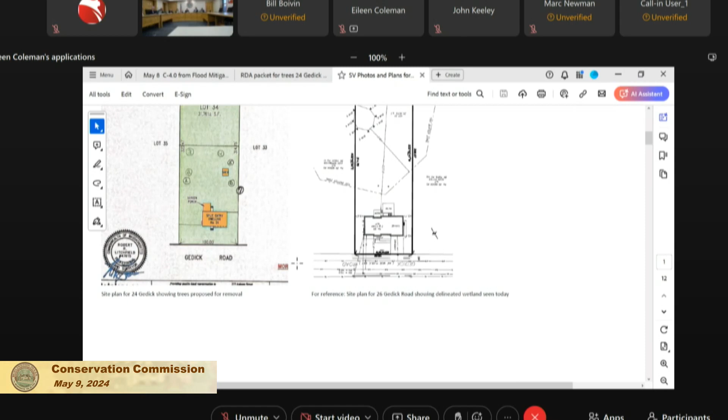Okay, and Bill? I think that the applicant has done an excellent job getting information, and he talked to multiple tree companies. They got clear evidence that these things are damaged by insects, and they've already damaged his fence and his shed. So I think it's quite clear that it is appropriate to take those trees down. All right, thank you, Bill. I have nothing further to add.

Everything's been said. So we have a draft decision, which essentially, if it's approved, will approve the tree cutting with a few standard conditions just for protection of any area in back. So first we'll review it, then we'll vote it, and then we'll have you well on your way. Okay. Sorry, I went back too far. Okay, we'll try that again.

Okay, so, as described, applicant proposed to cut 7 trees within the 100-foot buffer zone to bordering vegetated wetland. As described here, we know there's wetlands at the rear, across the entire width, closest at the rear left corner, and the commission is not making any finding as to the exact boundaries of the wetland resources. The closest trees were approximately 20 feet from the wetland. The application included an evaluation of the trees from a certified arborist.

So this will be a decision only for work as described this evening and no other work. Applicant may proceed with 7 tree removals. Removal of any other trees will require additional approval from the commission or administrator and may require a further assessment by a certified arborist. For tree removals that are not feasible to do by hand, machinery such as bucket truck or crane should be located in the driveway or existing lawn areas, so just not too far back. I had initially suggested 5 trees in this decision, which we can talk about the numbers. Alex was hoping it would be more like 3.

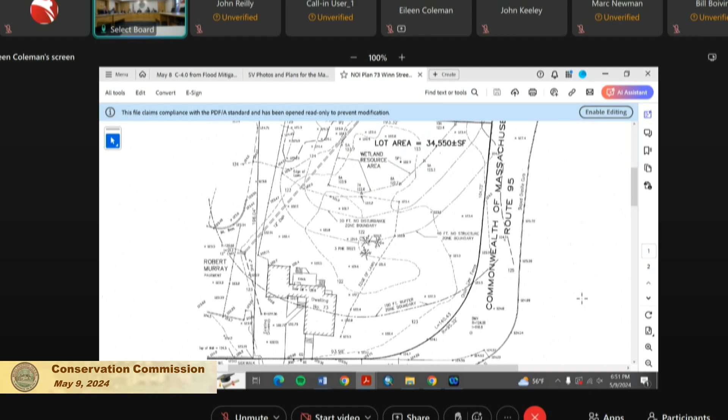As you can see, the 100-foot line is the furthest one out, and it goes through the existing house complex, family room, garage, deck, and driveway. And that's why we're here tonight, because we propose to work in that buffer zone and remove that house.

Coming up to page 2, you can see our proposed construction, showing the resource area, the 30-foot and 40-foot buffer zones, and the 100-foot buffer zone. We propose to remove the existing dwelling, garage, family room deck complex, and driveway, along with the paving that goes out to the paper street in the rear, Winfield Avenue. We'll replace that with a freestanding dwelling in the front of the property, approximately 30 feet back from the street line, and bring a driveway in where the existing curb cut is, on the left-hand side, which would service the existing dwelling and also go around the rear of the house to a proposed garage, freestanding on the right-hand side.

All of those structures are outside of the 30 and 40-foot buffers. They are obviously inside the 100-foot, which is why we're here. From the standpoint of grading, we plan to remove everything, but the grading will be pretty similar to what's there now, just reshaped to accept the new structures. We proposed 2 stormwater management areas, one in the front and one in the rear of the house.

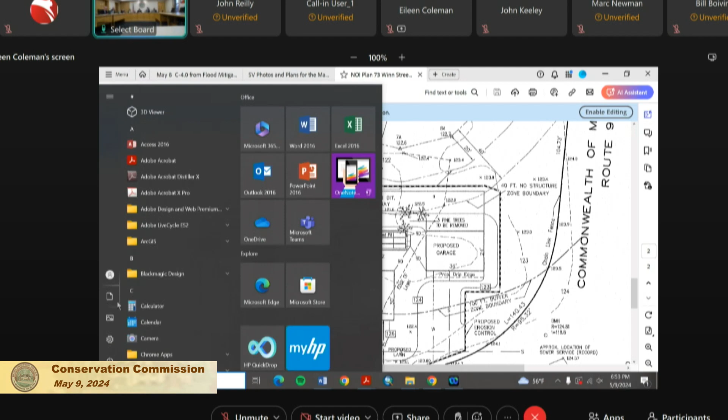All right, good. Thank you for that summary. Thank you. Sure. All right, so John or Eileen, do you have some comments on this one? I do have some comments.

First, I want to ask Mr. Mello for a clarification. Did you say the pavement is being removed at the rear of the lot that goes back to Winfield Avenue? That's correct. Because that's not shown in the plan, and there's no erosion controls. So all the way up to the top of the plan where Winfield Avenue is, that pavement is being removed?

That's correct, and that's something we've talked about that isn't shown on the plans with erosion control on it. If the commission sees fit to allow that to come out where it is back there, we would put erosion controls and amend that plan. That would allow us to eliminate the access—I call it access because the abutters use it, but it is paved out to Winfield through there—and our project has no need for that, so we'd like to eliminate that paving.

That was not anticipated initially, but Mr. Casciola and I have talked about it. We think that would be a benefit to the resource area itself. Yeah, no, I agree.

So first I'll talk about the resource area. The wetland flags seemed fine. It's a fairly dry wetland on the edge where the flags are, and then it gets wetter and wetter as you go towards the rear of the lot.

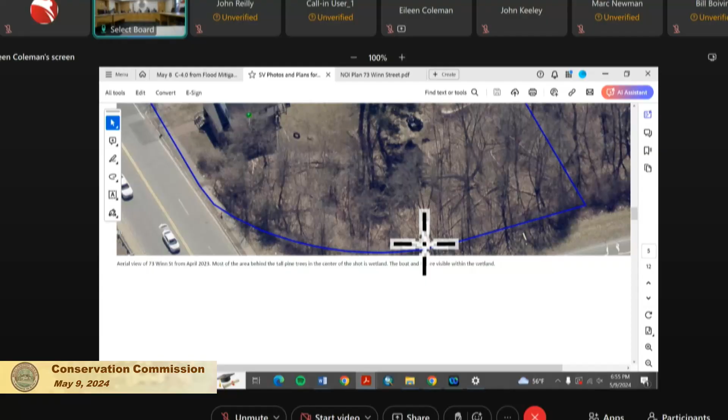There is a drain pipe that goes through there. We did find that there was a structure about halfway back on the lot where the rim or lid of the structure was off of it, and that needs to be addressed. There's a photo of it—it looks like a dangerous situation for kids or whoever. What is it, exactly? I'm not sure if it was an old catch basin or a manhole.

Mr. Keeley, if I may, through the chair—we found that structure shown there; it shows up on my plan right next to, I believe, flag 4A. We do show that on the plan, and we believe that it is the terminus, or the beginning if you will, of the pipe that comes out of the wetland, feeds through the property, into a catch basin on Mr. Murray's property adjacent.

At one time, I think there was a catch basin that was probably a reasonably good structure and has fallen into disrepair. It's off our property, in the Paper Street, Winfield Ave. But we're not adverse to addressing it.

This catch basin here where the cursor is? No, that's one end of it. If you go diagonally up, about 4, right there. Flag 4A is right where this conglomeration of block and pipe is. You mean this pipe here, sticking out? Yeah, the middle, I believe. Oh no, we'll get to the pipe in a minute. But I believe that pipe sticking out may come from this structure. I couldn't ascertain that, it's a little blocked.

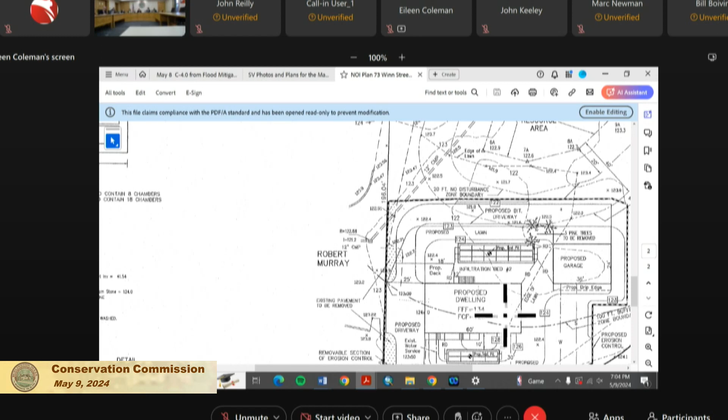Bill? No, that's not what I'm talking about. I'm talking about right above the words existing driveway, there's a catch basin. Oh, I'm sorry. That's a small area drain, and that's going to be eliminated. It'll be eliminated, it does not show up in the proposed conditions, it's no longer necessary. My apologies, I misunderstood the question.

No problem. Say Bill, I think I cut John off, so I'd like to go back. Oh okay, sorry, did I? All set, oh I wasn't done with all my comments. I got done with the comments about the basin for that. Yeah, I wanted to go back to your comments so we could go through everything before we started commenting too much more. So if you hold off just a minute Bill, we'll go back to you.

Yes, definitely, we'll be back to Johnny. We're out of time, you know, we don't want to cut him off on his last couple. Do you want the rest of my comments about the project overall?

Yes. Okay, so in addition to the structure we're talking about in the wetlands, there's a number of other foreign objects in the wetlands. There's a trailer, there's a boat, there's a lot of trash and debris that needs to be cleaned up. So I think you're going to have to authorize some equipment in the wetlands to clean up the basin thing and also some of the other stuff.

It actually looks like maybe former residents used it as a dump or something. There's a lot of old glass and cans and stuff like that back there that need to be cleaned up. Clean it up. Yeah, we got it.

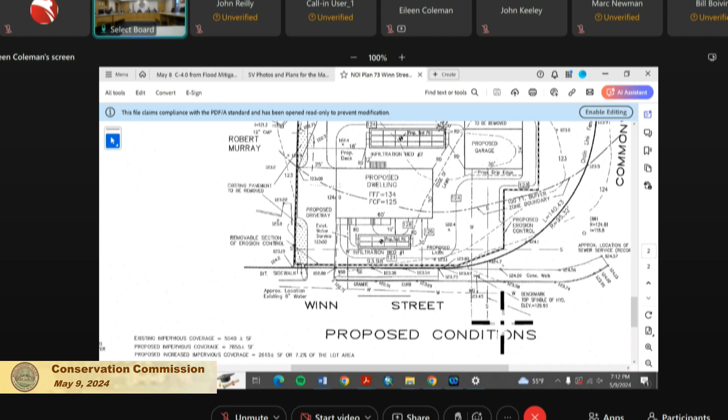Okay, does anything need to be done, John, in this regard? So we just need a new table of the proposed impervious versus the existing. Okay. And if I'm going to do that, I'd also like to alter the limit of work and the erosion control. Yeah. And we'd be happy to do that subsequent to any action the board may take. Okay, I'm done. All right, you are done. Okay.

Sarah? Just 2 comments. I'm just struggling to understand why the driveway does the thing that John pointed out, why it goes all the way around. It seems to me if you change the aspect ratio of the house, maybe to be portrait instead of landscape, there would be room for the 2 side by side. Wouldn't that be a better use of land? That's one comment.

Second is there was a structure in the backyard that I could not identify. It looked like a concrete donut with some sort of a hole under it. I wondered if it was a well. It's not mentioned anywhere on the existing plan. I'm kind of thinking it's a fire pit. I thought initially it was something too, and my guys poked around and put a stick down and couldn't find the bottom.

Yeah. We've asked. It doesn't seem to be connected to anything. It's certainly not anything to do with sanitary. That's key. Well, it might have been at one time, but we don't have a lot of good historical records. So we know that we have sewer, and I know what you're talking about, and I don't know either. So what do you want to call it, a concrete donut? Concrete donut. Yeah, I like fire pit. All right. Oh, that thing. Okay, Rob?

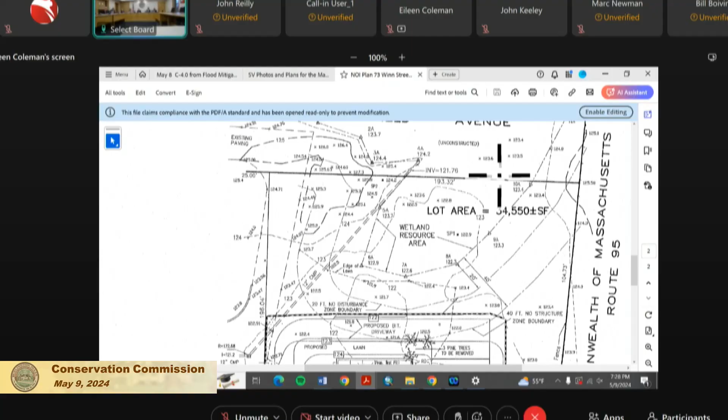And the water out there now is at 123.5. It's meant to maintain it, not drain it. I was just concerned that the rim might be 121, and that would clearly do a serious drain. That's the invert of the pipe. Okay, thank you. Is there anyone else that has a comment?

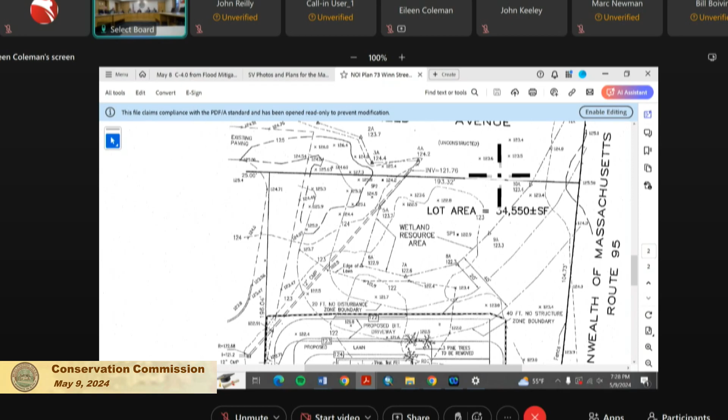I have one more question. A lot of the front of the wetland, where the line was done, has a lot of invasive knotweed. So I'm asking the staff, do we want to ask for some effort at removal, or it's not easy to do either? No, and it's not limited to just their property either. It's on the Commonwealth property, it's on the Paper Street property. So it's pervasive. It would probably just come back if you removed it on this parcel. Okay, just thought I'd ask.

Larry, can I ask a question, please? Sure. I'm wondering, that big driveway going back around to the garage, is there a possibility that could be something like grasscrete or a ribbon driveway, just to reduce the amount of impervious? Allow me a moment. You want to take the paving out of there? We've had our moment. We've just negotiated. You can take 2 moments. Well, we'll take the solid bituminous paving out and we'll put crushed stone.

Okay, gravel driveway, that sounds good. Okay. Okay, so let's go over a couple of things. It sounds like we need a revised narrative, and we need a few changes to the plan to indicate everything that we've talked about.

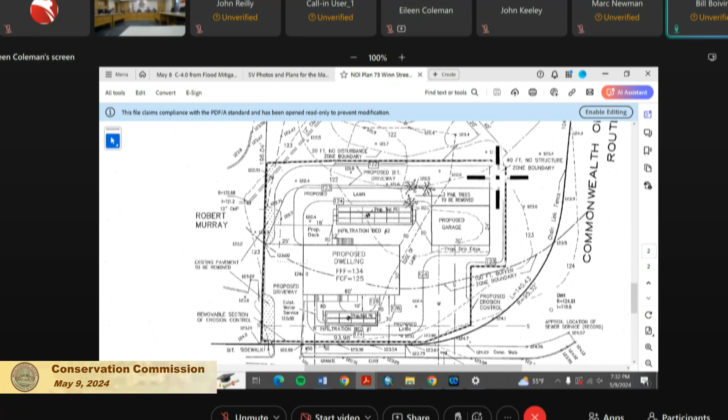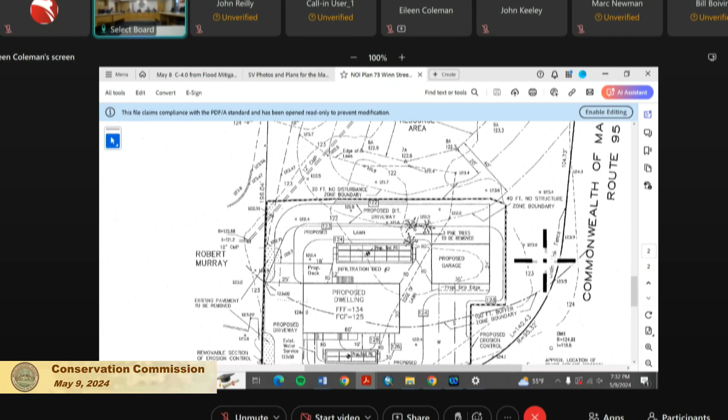So I think we have a good summary. I got one more thing, Larry. Yes. This is Bill. I think there should be, in the finished product, some kind of demarcation at the 20-foot no disturb fence, to prevent mowing and intrusion. All right, we certainly can put that in the order.

Okay, anything else? Well, they're conferring again. Did you folks have another moment? No, we've had plenty of moments, thank you.

Just more of a question of where we go from here. Do you want us to revisit at a future meeting, come back to see the commission, as opposed to issuing an order and incorporating? Well, are you asking whether we will close at the next meeting? I don't think we have a draft here. I'm just aligning my calendar. Let me ask, do you see any reason why we can't close at the next meeting? If they provide everything that we talked about this evening, then I think that would probably be okay.

Okay, and we have to get it in by a certain number of days ahead of time? Forthwith. If you give me a date. You mean for the next meeting? No, to resubmit. Oh, well, ASAP, a few days before. Okay, so next week. When's the next meeting? May 23rd. Can you get it in a week? It's an eternity. Have it done next week. All right. Okay.

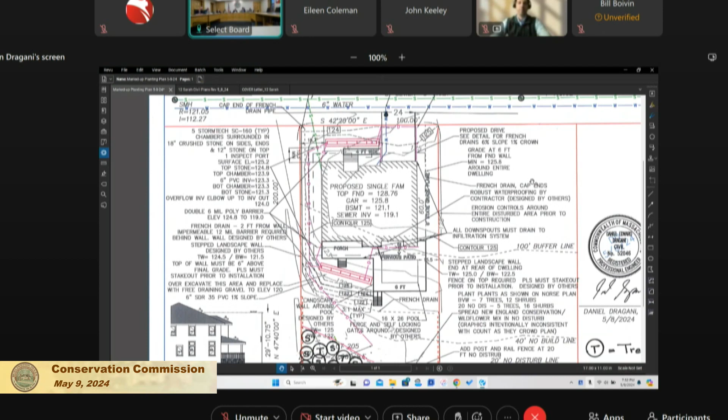Okay. The overflow outlet from the infiltration system had originally gone down parallel to the property line. So it was discussed at the last meeting to shift that towards the middle of the property, towards the wetland, again just to try and reduce any water or possible impact to the neighbors. So we have provided that revision as well. So the overflow pipe, that's the pipe that's going to the middle of your yard now? Yes. Okay. All right. A post and rail fence has been added along the 20-foot no disturb zone.

Plantings. We are proposing to restore the BVW. Trees are proposed 20 feet on center, shrubs 10 feet on center. So in the BVW, we're proposing 7 trees, 12 shrubs, and a wetland seed mix. Mr. Chairman, I called a number of nurseries trying to get a black willow. No black willows. I actually thought that would be the case. Unfortunately. But I did make the attempt to try and get the native black willow. I don't know why they don't carry them, but they don't. Got it. I understand.

Buffer zone plantings. So we're proposing to restore the 20-foot buffer, 20-foot no disturb. We're proposing 5 trees, 16 shrubs, as well as a conservation wildflower mix in this area. As part of this proposal, I'd like to extend the erosion controls around the back of the property, down the rear property line, because in the BVW there was some stockpile of wood and branches and that type of material. I'd like that material to be removed, trucked off-site, stake the wetland flags, plant, apply the wetland seed mix. The temporary wetland disturbance is 1933 square feet. Again, that will be temporary to remove the material, plant, and essentially let it come back.

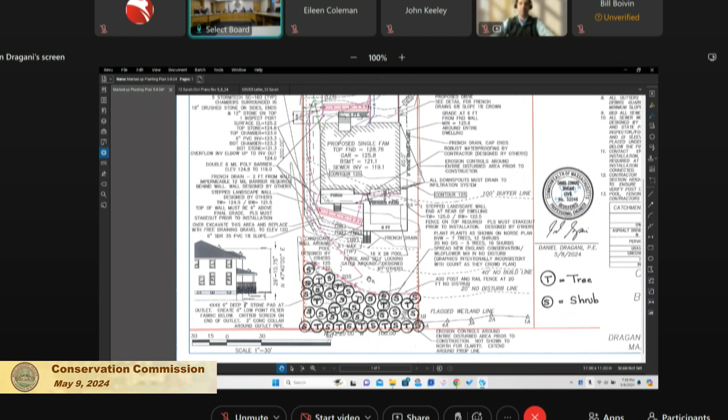I addressed the DEP comments. DEP had comments regarding reviewing aerial photographs and seeing several structures in the rear yard. That obviously was removed prior to the NOI filing. I did not remove those. Those structures were removed by the previous owner. Okay, I stand. What was this? They had a few sheds in the back. Right, okay, yeah. Okay. The NOI form has been updated to include the proposed temporary BVW alteration to remove that material from the BVW, the wood and the debris, and to do the plantings as well.

I know drainage was a concern, and I'm going to hand it over to Dan, who can talk about the additional work he's done regarding infiltration and drainage. Thank you, Maureen. So just briefly, previously we met the standards of installing a drainage system in the front of the property. At the last hearing, the commission requested that we expand that system within the front of the property. In looking at the standards, we become too close to the property line there. So it is my professional recommendation for the additional drainage facilities to be proposed in the rear of the property. We are proposing to double the size of the stormwater system based on what we originally proposed. And that's also in addition to some additional chambers we had added based on comments from the Town Conservation Department. So what we show here today is a very robust design, and I'm certainly pleased to show it.

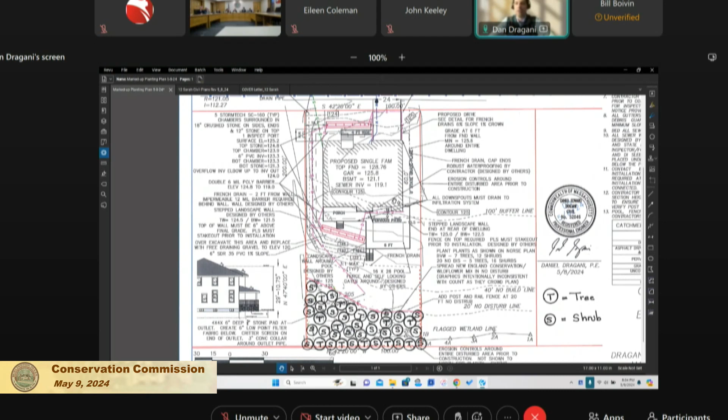So if there was a very heavy rainstorm, is there a possibility of water flowing over the wall? Currently we have the wall protruding an additional 6 inches in case of surface runoff, which will run into the drainage systems. We also have a backup French drain before it gets to the wall. But if it gets past those two systems, it would be met with a 6-inch height it would have to rise over to come over the top of the wall, essentially bringing that water to the rear of the property, if that helps answer your question.

I was also wondering about water and snow — if it's stepped, what's the width of it, and does it create an impervious flow versus just trying to retain all the water within the applicant's property?

That wall essentially is just retaining the land to provide us a higher elevation, and we're going to extend the top of that wall higher so that any surface runoff wanting to flow in that direction won't be able to freely flow that way.

Is there anything — I know it says the wall will be designed by others — but do you know if it's timbers or stone? I could certainly double check with the applicant. My guess would be this would be essentially a stacked retaining wall, those blocks you commonly see that are about 8 to 12 inches long, stacked.

Go ahead, Rakesh. Sorry, that is with the blocks. Okay.

Okay, Sarah? My understanding was the reason there was originally not a catchment basin infiltration chamber in the back of the house was that the water table was too high back there. Could you explain why that's not a problem anymore?

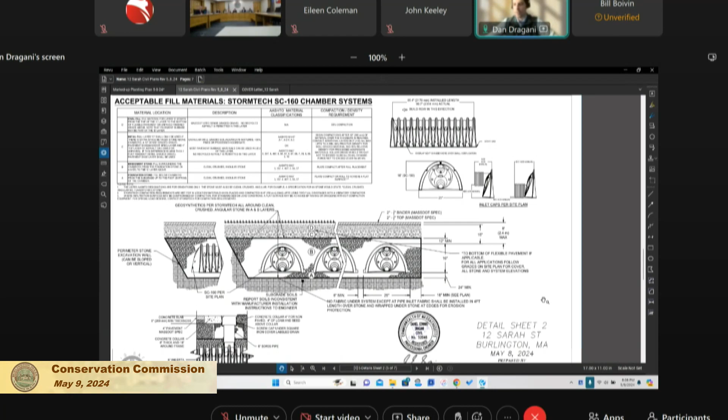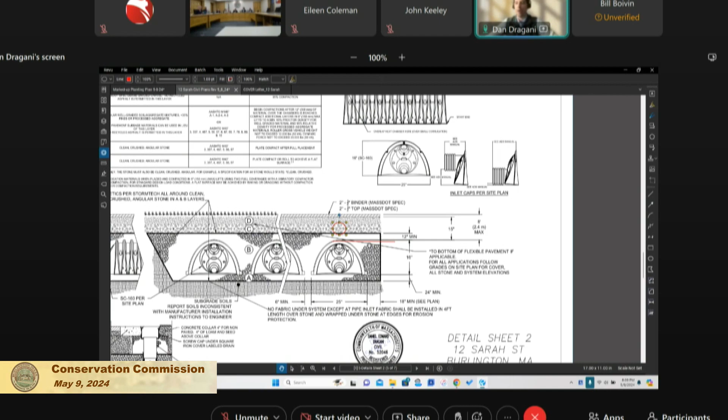Sure, of course. So I can go to the technical details here and try to draw the overflow pipe. The top of the system is located here, and the invert elevation for that overflow pipe will be something like this. Essentially those drainage facilities need to completely fill up, including the two feet of crushed stone on the bottom of the system, 16 inches of chambers, and also stone cover on top. Those all act as volume that those systems capture. So for water to come out that outlet pipe, it has to fully fill the drainage facilities in order to do so.

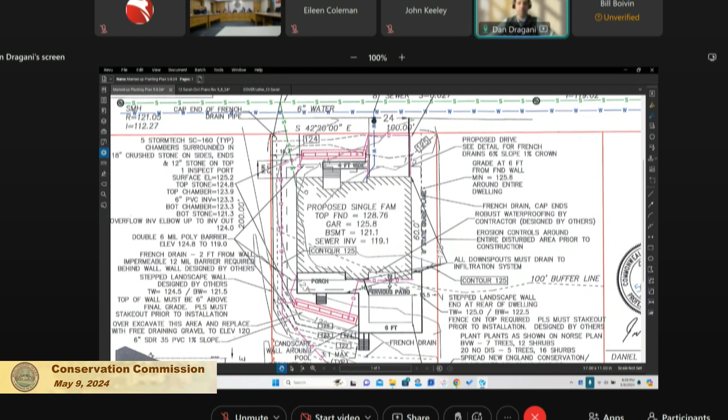That front of the property, I can flip back to the other plan. Essentially we're picking up the runoff from the driveway via French drains that flows into the drainage system. It also picks up the roof leaders from the front, and those all flow into the system. It will then have that overflow pipe at a higher elevation than the system elevation, and that also goes for the system in the rear. We've proposed those elevations for the overflow to be higher than the existing or proposed drainage facilities shown on the plan.

So in larger storms, you may see water coming out of that outlet pipe. We have proposed a stone pad there to limit any erosion or concerns, and also a concrete collar around that pipe just to retain it in its current location. The intent is for this to be a bit of a depressed location, so that pipe isn't essentially just right there on grade, if that helps to answer your question.

Is that really going to help where all of this ends up, on the lower end of the property? That's where all this drainage is going from a number of homes, including, what we've learned, the homes behind these on another street. Is this going to add to that because it's all going to one location?

Sure, of course, that's a good question. So running the HydroCAD analysis, this reduces the volume based on which storm you look at. It reduces the total volume of stormwater by about 15 to 20%, which is definitely significant for this lot. You will still see flow coming out of that outlet pipe during larger storms, but we have reduced the volume of stormwater by 15 to 20% overall.

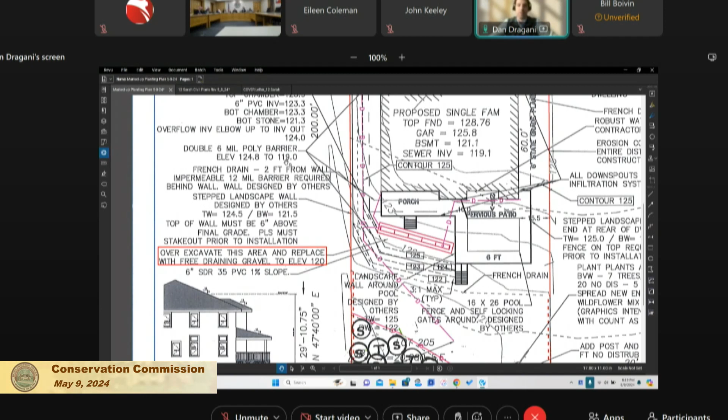Yeah, I am impressed with that design. Thank you, thank you, appreciate that.

Okay, yes John, so one other thing, just a question for the commission. Would you feel comfortable closing this hearing prior to seeing a design of the retaining wall? So the retaining wall isn't being designed by the project engineer, somebody else is designing it. Given its location, I would suggest you want to see a detail of the wall.

Unless you can - when you build a wall, Indra, this is your area - can you put up a performance spec on the wall that would essentially guarantee you're going to get what should be done? Or do you need to see the actual design? Actually, the retaining wall is to retain the earth. So that's what we see - what material, how deep it is, how high the wall is. This is 3 feet high.

So you would say it's better to see the design, or can you do it on a performance basis? It can be - I don't think we need to see the design. It's 3 feet high, right? Am I correct? I'm not sure. Correct, yeah, it is 3 feet high. Yeah, so I'm not too concerned.

Because a lot of times they do a performance spec and say it must be X, Y, and Z. In the spec it would be the material, what material it is. Oh I see, no, nothing - and I'm not concerned about it. So for instance, for a 3-foot wall, would it require weep holes? I don't think so, no. No, it's unlikely, right? It's too small, 3 feet is really small.

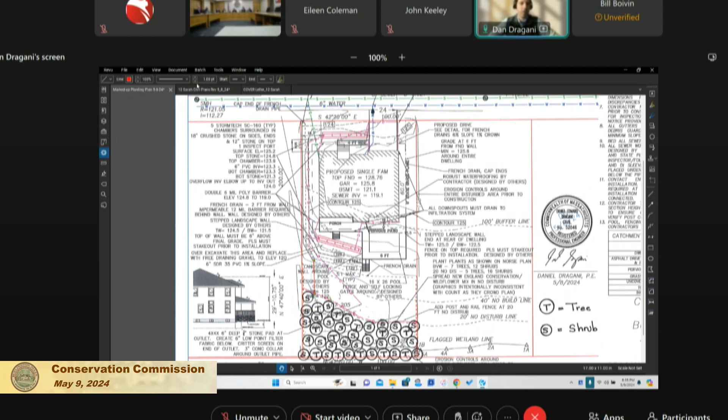And looking at the plans here, it looks like it goes just along the porch. It doesn't really go beyond my backyard where the grass area is. It's still within that area, and I didn't know if it could go further out, but now it looks like the wetland mark has been moved closer, so it doesn't seem like it can go any further. Yeah, I think we'd be open to that, though. If you'd like an extension here, I would be open to that if that's something that concerns you.

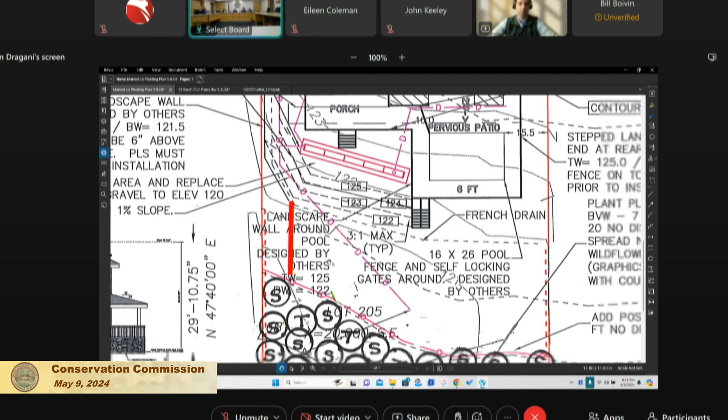Could you blow it up and show us where, because it's very hard to see here, it's so small. Sure, of course. If you'd like to see an extension in this location, I'd be happy to do so. I certainly work for the developer here. I just want to put it on record. I don't make up numbers or do anything different based on who my client is. I try to design these systems and properties as if I live next door. So I just want to express that.

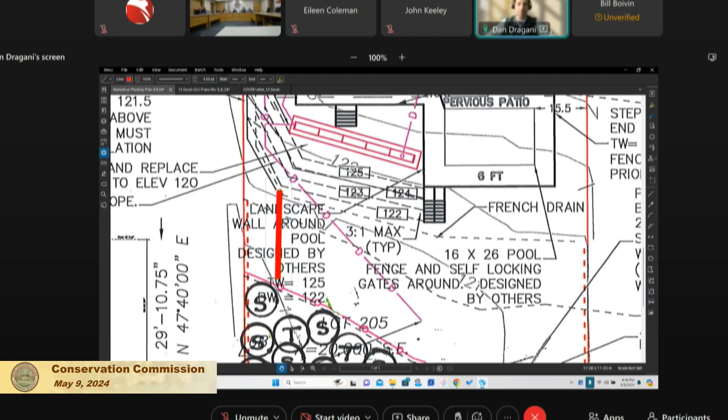I have a question regarding the French drain. This is Sarah. Is the purpose of a French drain to take up surface water that percolates down into the French drain, or is it to take up groundwater that's getting to be too much? Because if it's surface water, then I'm wondering how that would work in the case of snow, ice, and so forth that made the surface somewhat impervious. I know this has been somewhat discussed, but isn't that water just going to run off and do what it wants and not go down into the French drain and behave itself?

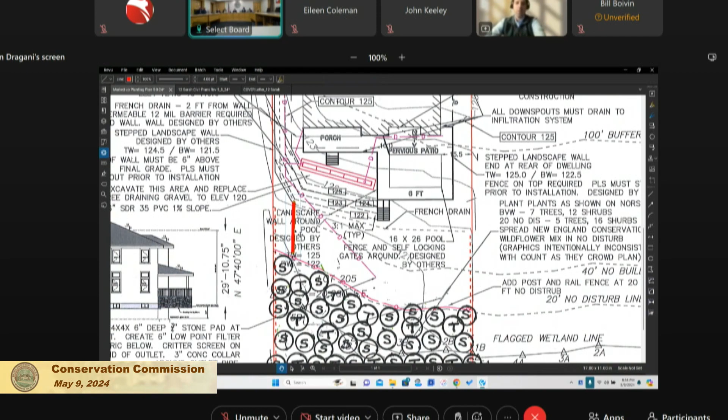So let me show some of the details here just to help out. One second.

French drain here. So essentially the French drain, the ground level elevation that's proposed is here. So that's what's shown in red. And essentially what this does is if there's runoff coming on the surface, it's able to pick up that runoff and essentially put it into a void space and allow that water to percolate over time. If there is ice over this, you're absolutely right. They wouldn't be able to get into that system.

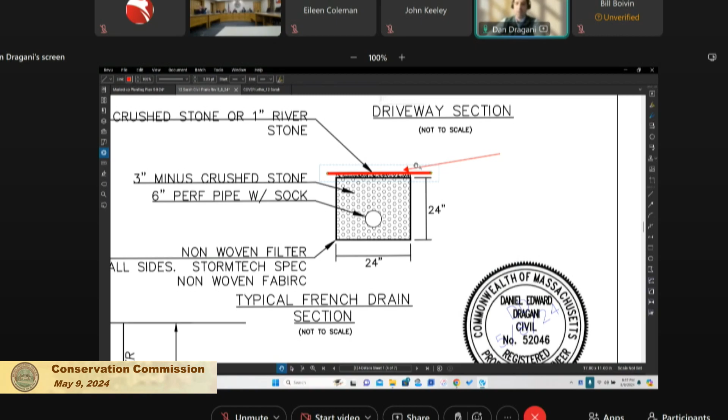Now, if I can just go back to plan view here for one second. All of the roof runoff that's coming from the gutters is in a closed system, so that's closed piping. So in the event that there was a large buildup of snow and ice on the side of the property here, all those systems are still in a closed pipe system that would essentially bypass that and allow that water to go and percolate back into the ground.

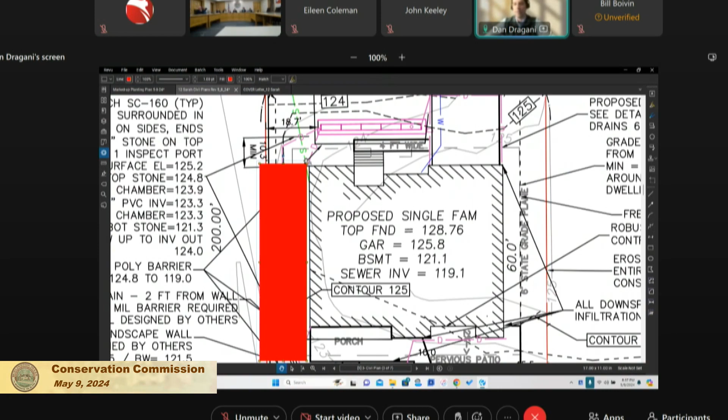Okay, I understand that. So it would just be the rain that would fall on the red area that could possibly run off because it can't get into the French drain. Exactly. The red rectangle you just had shown there. Okay, yes, so it's correct, not a huge amount of surface area. Is that your point, that you shouldn't worry about it because that's really only just that little area of land, the rainwater that's not dealt with? So that's not a concern? Yeah, I mean, it's just grass, right? So that area is not impervious. There's no pavement there. And also that wall will be proud by 6 inches.

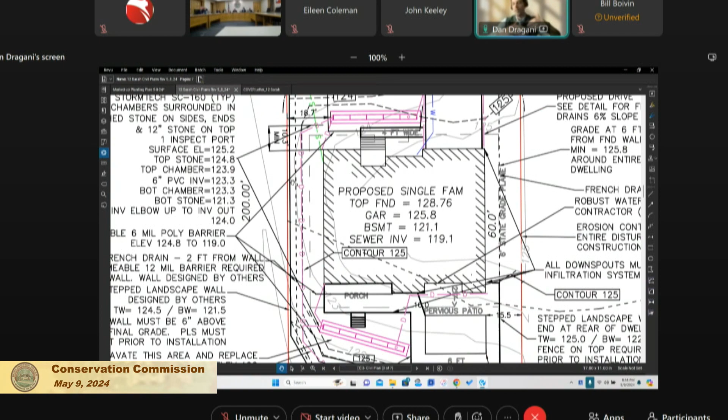Could there be a situation where there's a large ice storm, that there's ice buildup on the side of the property? Absolutely. It could be a condition like that, but I don't see it to be a significant risk, and I think it's a good comment. It's just not something that we can capture, right? We would have to extend the elevation of that wall up a significant amount, the retaining wall Mr. Hickey referred to, yes. It would look a little strange. So that would be the only concern, just from an aesthetic perspective. Okay, all right.

Do you have any other comments? Because I have one last comment. Yeah, so Commissioner Debbie, are you confident with a 3-foot wall and a 6-inch differential between the top of the wall and the grade, or should it be higher? Should the wall be higher? Should the grade be lower somehow? Well, yeah, if there is snow, 3 feet or 2 feet of snow, of course 6 inches will not hold. So how far do you want to go?

And how many times do we get more than 6 inches? I mean, you're talking a small area, you're not talking a wide area with snow. It's a very small area, relatively small in width. And as I say, everything is subsurface, so even with 2 feet of snow on it, the drainage, all the pipes are underground.

Right, I understand that. But to Ed's point as well, with the wall and the soil level 6 inches below, should the grade be brought down further than 6 inches versus bringing the wall up? Should the grade of the soil be brought down? You're saying the land should be sloped? Yes. Should it be sloped more to help retain? Let the engineer answer that.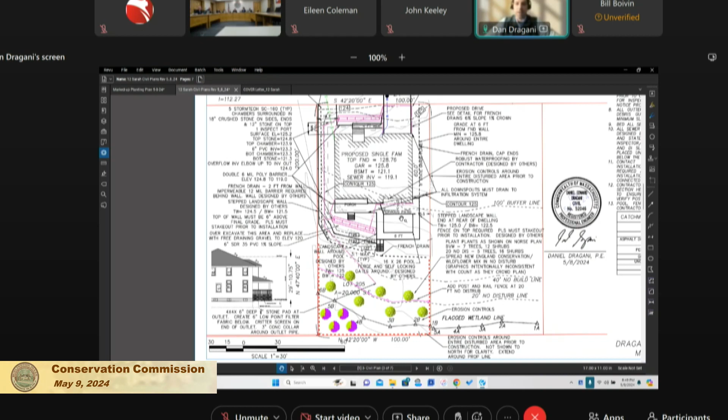The system that we previously proposed still met the pre versus post standards for stormwater. And we just made that a bit more robust. But again, certainly happy to talk to you offline. If you want my contact information, just reach out and I can definitely link up with you. I'd be happy to discuss it with you. Right. Why don't you send your contact information to the office if they don't have it? Dan, are you actually talking to the neighbor? Yes, I am. Okay, he just left. Okay. I'll connect you if you want.

Do we have this engineer's information? Yep, we do. Okay. All right, I'd like to get a copy of it, not that I need to talk to him, I just would like to have who is doing stuff. Yep. All right, so I will say that the engineering on this project, and the owner, of course, have gone out of their way to respond to each one of these concerns. And that should be noted for the record. All right. Thank you, I appreciate that.

All right. So could I have a motion? So just to clarify, you're looking for one plan change? Are you extending the French drain? Is that what you agreed? Yes. Okay. Are there any other changes we need? I think that's it, right? That's it? Yeah. Okay. Could I have a motion to continue the hearing for 12 Sarah Street for DEP file number 122-704 to the May 23rd meeting of the Burlington Conservation Commission?

So moved. Second? Second. Okay, Bill? Yes. Indra? Yes. Rob? Sarah? Yes. Ed? Yes. And I vote yes. The hearing for 12 Sarah Street is continued to the May 23rd, 2024 meeting of the commission. And we'll have a draft decision ready for that meeting.

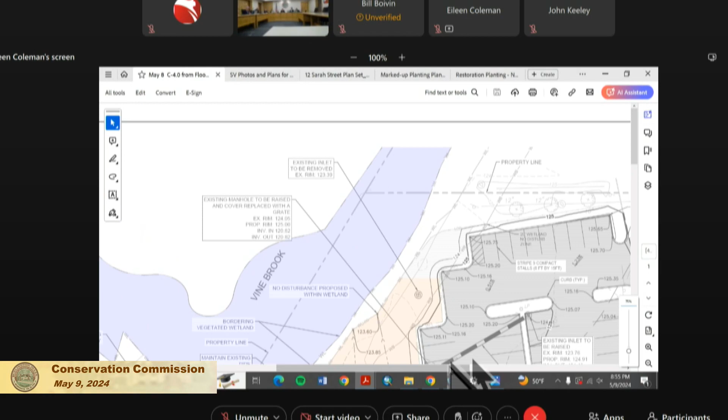Yes, I actually did forget to mention that, but you can see the existing manhole. Can you blow it up a bit so we can see it a little better? Is that big enough? No, I'll go closer. So that's the existing inlet. Just below it, there's a manhole that's called out on the plan to raise the manhole rim to where the new grade is going to be, and then instead of a top cover like a normal manhole would have, it's going to have a grate on top. So it will basically act as a second inlet to replace the one that's getting removed.

So obviously this parking lot would only have one catch basin if you eliminated the one that's now out in the landscaped mitigation area. And there's a raised island in there, so all the stormwater isn't going to be able to get into the catch basin on the right-hand side. So they're proposing to convert a drain manhole, put a grate on it, and basically have it function as a catch basin, which isn't ideal. Then you now will have a catch basin to catch basin connection.

They're pretty limited out here on what they can do between high groundwater and a lot of underground utilities and whatnot. So it's not an ideal situation as far as stormwater quality goes, but it sort of functions to drain their parking lot.

Will it be able to handle? Pardon? Will it be able to handle it, the rainwater, the stormwater? Yes, so it would be sized to be the same size as the inlet that it previously was before. So the bottom line is, at each one of the incremental elevations, 1 foot elevations, the amount of cut will slightly exceed the amount of fill at each one of those elevations. So they will meet the performance standards for bordering land subject to flooding.

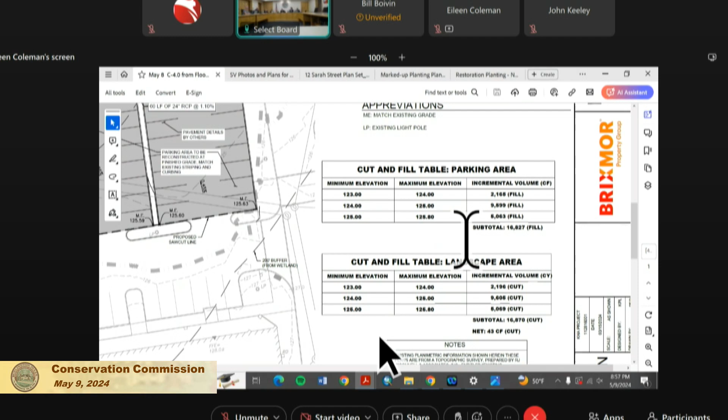So could we go back now to look at the flow of the water in that area there? I was just showing the cut and fill table. I'm not sure how thoroughly they've designed this. This was sort of a first, I don't know how much engineering, well, I guess you've got plans ready for tomorrow, so I guess maybe you have. So my first question would be, when you're talking about the flow of the water, are you talking about the flow of the water in the parking lot itself? Flow of the water in the parking lot itself and coming up through the catch basin.

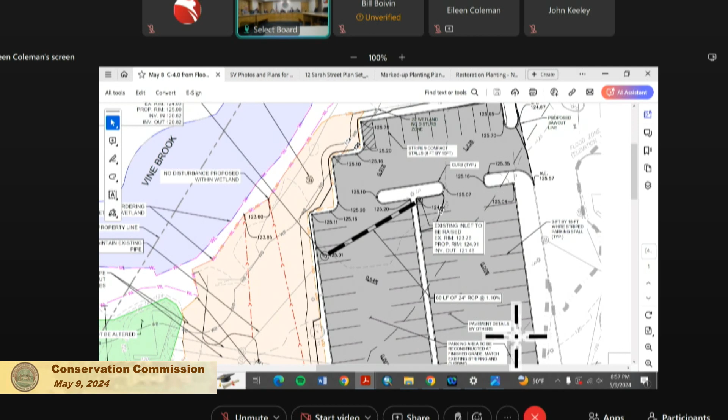You can go up there and point if you want, if it's easier to describe. Oh, yeah, I can do that as well. I know it's old fashioned, but whatever works best. You know what? I have a laser in my drawer. I'm going to bring it next time. Yeah, definitely bring a laser. Start bringing it to these as well.

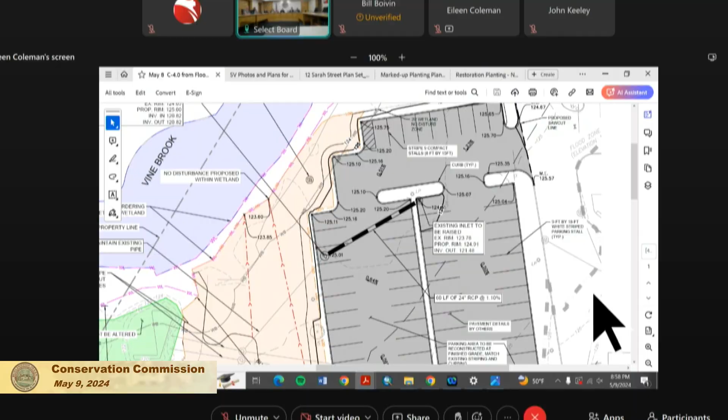But you can see the arrows that are right here. This is where the flow is supposed to be going. So it is pretty flat. It's not the most ideal. It's more than 0.5%, but because we're raising this whole parking lot, it's kind of the best that we can do. Was the parking lot flooding because of the surcharging through the grate? Yes. There's multiple reasons, but that is certainly not helping. Right. So a lot of the water was just overflowing and filling up the parking lot.

Okay, so now what I'm trying to ask you to describe to the commission is where the water is going now. Show us the flow of the water. Once it comes up, it's still going to come up the grate? No, so that's why the entire elevation is raised. It's raised to be 6 inches above what that water was already getting to. So the idea is that now it all has to continue moving through. And where is the water coming from? That ravine that was there? The ravine. So that ravine will overflow, and now it's going to go in the brown area and it's going to come around.

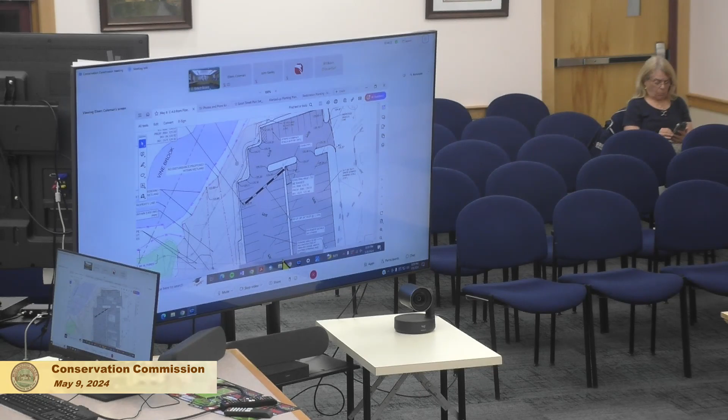I'd like to see the rest of it. Oh, sorry, you want me to move it? I want to see the front of it. Zoom out? Yeah. Gotcha, okay. Raise it up a little.

And so now it's going to go from right to left on the drawing, following the brown area, and come around and fill up. So are you talking about when it rains? Yes. When it rains, the idea is that it will continue to go back in. Before, it wasn't continuing to go all the way down because this area was low enough that it could just stay there and wasn't forced by gravity to keep going. Now it's being forced by gravity to keep going because this is higher than this. Okay, so the water's going to flow which way? It flows into these two inlets, both existing, and then through this pipe that's here.

And it's going to flow in front of the green area. And then, yes, that is the existing basin that we're not touching at all, so that it can continue to work as it's been, and then flows through the outflow. So that existing spillway is where it keeps going. Okay. That's what I thought it was, but I wanted to make sure that was still the intent. So the brown is really not intended to be used except for an extreme flood event. That's why we're providing compensatory storage, because it's in the floodplain, providing the same amount of cut as we're proposing to fill, to make sure that the water is flowing. Right.

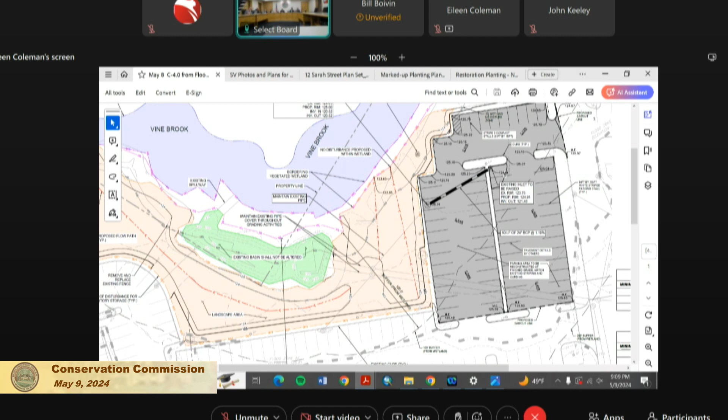Even in front of the green area? Yes, so these numbers say like 124, and where those are calling out, those are the lines of, at that space, it is 124. Great, thank you for putting up with that question.

I think Bill is correct. It's probably not a concern. Was there anything else? I'll stop talking. I'm done.

Anyone else? All right, is there anyone in the audience for this? No. Anyone online for this? All right, so John and Eileen, are we thinking that we can approve this so they can get their project started at the next meeting?

Quite possibly, if we get all the information in time. Can you do that for the May 23rd meeting, a few days before? Actually, they said they were going to try to get it to us tomorrow. Yeah, so by tomorrow at noon, that's what we're shooting for. Oh, that's plenty of time. Okay, all right.